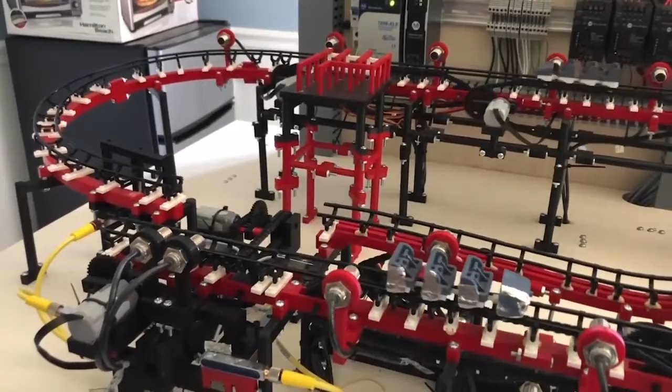All right, what's special about this project? So the coolest part about this model roller coaster is definitely the control system over here. It's a super interesting portion of this project because it's all PLC controlled, just like the real ride would be. We've got a safety PLC that is ensuring that the trains are in the right spot at all times.

We've got sensors that are detecting where the trains are on the track, and a bunch of motors on there that are all moving the trains to their proper location. It's basically set up to have a block system just like a real roller coaster, so it's keeping the trains separated, making sure that none of the trains are entering those block zones when they're not supposed to be. The system is also monitoring the whole operation of the ride, and will actually fault just like the real thing.

Those times when you see the roller coaster stuck up on the lift hill, and the maintenance guy comes out, this will emulate exactly how that works. The really cool thing about this is that because it's a model, we can actually trigger those faults and show people, hey, here's how a fault would occur on a real ride, and here's what is actually happening.

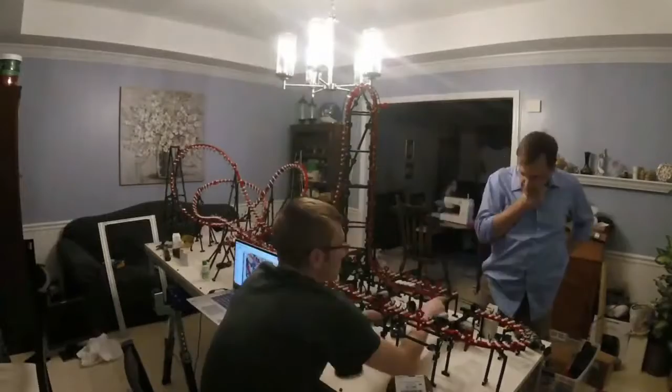Once I finished the design in No Limits, I brought it into Fusion 360 and designed all the track pieces and the whole tabletop, and designed the electrical system and all that stuff. Then we started printing - printed and printed and printed for like 3 months. It was crazy, we had like 3 printers running almost 24/7. It was insane.

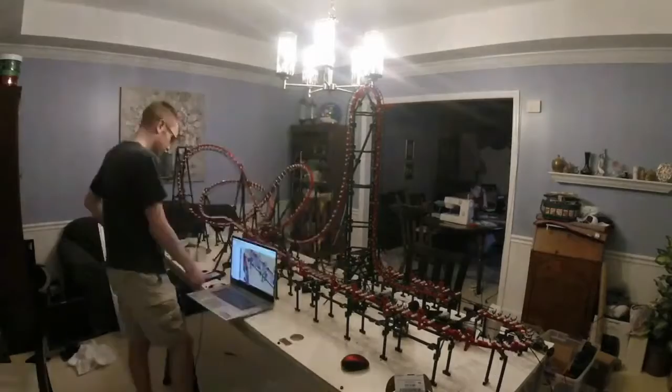And that was the time that COVID-19 hit. So now we're passing parts between each other because I was working with my advisor on printing everything. So we're printing, and then I'm getting to the point where I'm going to do the table.

One of the biggest challenges of the model was actually the tabletop. It was supposed to be CNC machined - I was supposed to take it into campus, lay it down on this 4x8 CNC machine, and cut all the holes, because I had designed the whole model so you could cut the holes in the table and then bolt down the supports. Well, that didn't happen because of COVID. I couldn't go down to campus because they weren't letting anyone down to campus. It was all closed.

So I came up with this idea. I don't have a plotter either, so I can't make a giant full-scale drawing to put on top of it, but that was the only way to do it and make sure it's dimensionally accurate. So I printed off like 100 sheets of paper, cut them all perfectly, and laid them down in a giant grid on top of this board. Then I went through and hand-drilled like 250 holes or something like that. It was a fun time, but it came out perfect - I was super happy with the end result.

Then, of course, I built it and put it all together over the summer, and that was about the point that Rockwell Automation had gotten all of the electrical stuff in, and I installed the electrical system. Over Christmas break this year, I spent an insane amount of hours programming this thing to make sure that it works perfectly.

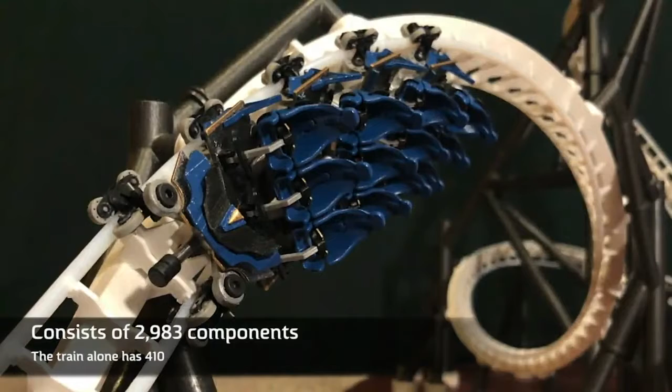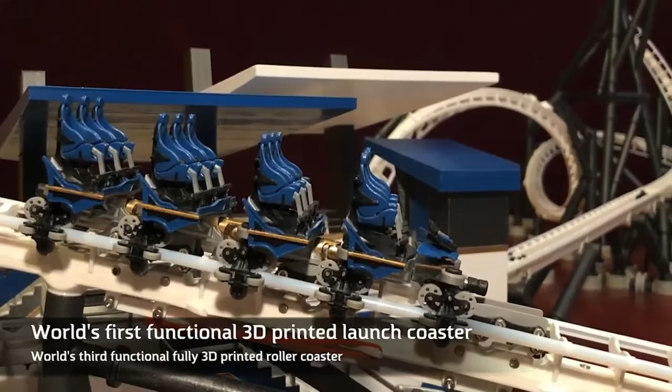Awesome. So tell me about your engineering journey through high school and college and getting to work in the industry. Yeah, so ever since I was super young, I knew that I was going to be an engineer. My dad was an engineer, so from a very young age I was instilled with the problem solving and general engineering curiosity for how things worked. Going to Iowa State after having an engineering class in high school really solidified my plan, and I went to Iowa State knowing that I wanted to pursue a career in the amusement industry.

I was given the opportunity to intern at Premier Rides in 2018, where that was just the time of my life - I got to see the ins and outs and the background of what actually went on behind the scenes of roller coaster design, which was the coolest thing to me. So then coming back and finishing up my time at Iowa State, you and I started the Iowa State TPEG group, which is an extremely rewarding experience. I think it's so important for kids to have that opportunity that we didn't have - to go to IAAPA and ASTM and have these experiences and opportunities from their freshman year.

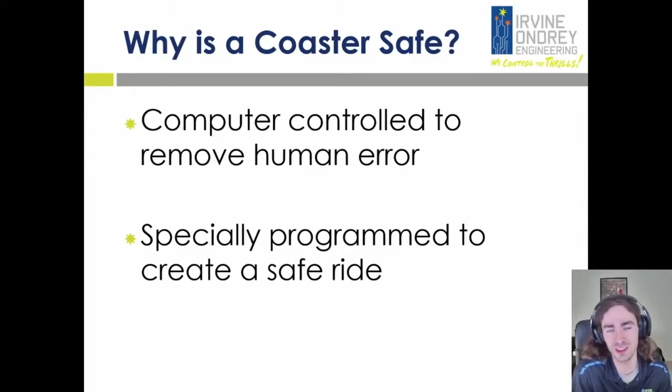So what makes a roller coaster safe? We have industry-wide safety standards that we have to follow, created by panels of the most experienced professionals. We design to very high safety levels. If you've heard of SIL and PL, we design to SIL 3 and PL e. These are the highest levels of safety and reliability.

We accomplish that through the use of things like safety processors. These are ControlLogix PLCs from Rockwell Automation, and as you can see, there's a pair of them. These work together and check each other during the ride's operation to make sure that everything is operating as it should. We also use Safety I/O, cards like this you'll see all around the ride. This is what reads proximity switches, causes brakes to open. All of the critical systems are controlled by these parts.

We also use a variety of other parts. These are safety relays. Rockwell Automation makes it real easy: if you see red, generally it's a safety rated part. We also use safe torque off with our drives. That's a way of making sure that a drive is not going to suddenly start moving without the proper authorization.

We specialize in simulated danger, and we try to make incidents as rare as possible because any event will become very high profile. If you've ever seen the news, it makes the news just for having to take people down off the lift, or even sometimes if it just stops on the lift. And we don't want to have any incidents worse than that.

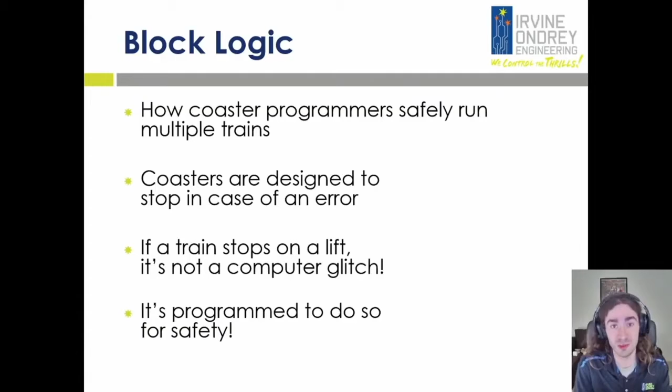The overall view of block logic will look something like this. You'll have the ride separated into a few blocks. Things like the station, the lift, the ride course, and the transfer track are generally all examples of blocks. The ride will have a way to stop the train at the end of each block, as well as a series of sensors, sometimes at the entrance and the exit, or just at the exit, so that the PLC is able to know where around the ride vehicles are located.

The way we program these, if you've ever heard of computer programming languages like C, we go something a little more basic than that. All the movement and computer-controlled safety comes from the PLC.

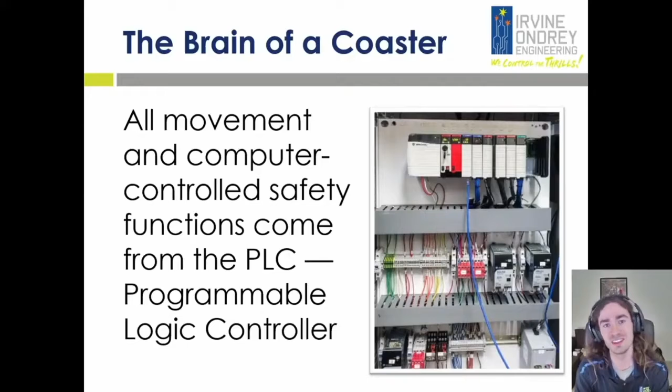One of these, as you can see, this is from another one of our attractions. It's called a programmable logic controller. Inside, it's running ladder logic, which is the descendant of old relay logic from the 1940s. We still have it, we've just computerized it so that we can run way more logic on these processors.

It's called ladder logic because the code looks like the rungs of a ladder. You'll have hundreds or thousands of these, and the PLC, as it's running, is constantly stepping down the line and checking each one. As you look at a rung, you check if all of these bits are turned on and it's able to get through the rung, then the circle there, that bit or that output will be turned on.

And these are able to run extremely fast, generally between 10 and 20 milliseconds a cycle. So we're constantly running this logic, constantly checking everything for proper operation.

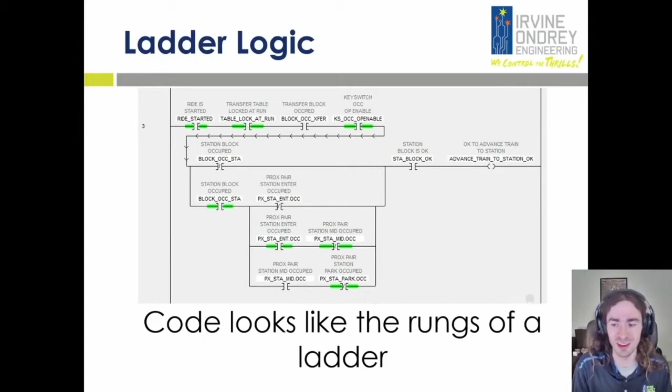So the inputs and outputs are sensors and our actuators. Here's a general overview of the way we do motion control and the way that the power flows to a motor. So you'll generally have some form of input protection, this could be a circuit breaker, it could be a fuse, just some way to make sure that you're not getting too much power through.

Then in some cases you'll have a contactor before your drive, or you'll just have a drive, and that drive will have safe torque off signals. These drives are designed so that if your safe torque off signal doesn't have power to it, the drive is not able to apply torque to the motor. That's an extra level of protection to make sure things don't start moving when we don't want them to.

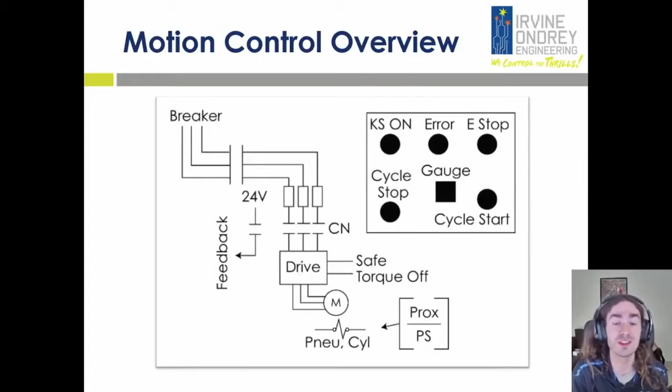And then the output of the drive will go to the motor. You'll also have monitoring on the motor to make sure that it's rotating at the rate that you're expecting it to, that nothing is going where you don't want it to. That's the main thing that we design for. You always want to have feedback, and you always want to have multiple ways to stop things from moving if you detect something that doesn't look quite right.

The most common input sensors that, if you've ever been to a theme park, you've seen these, are proximity switches. These use inductive sensors to look for metal. It can be a brake fin, it can be a wheel assembly, and that's what the PLC uses to detect where on the track the train is.

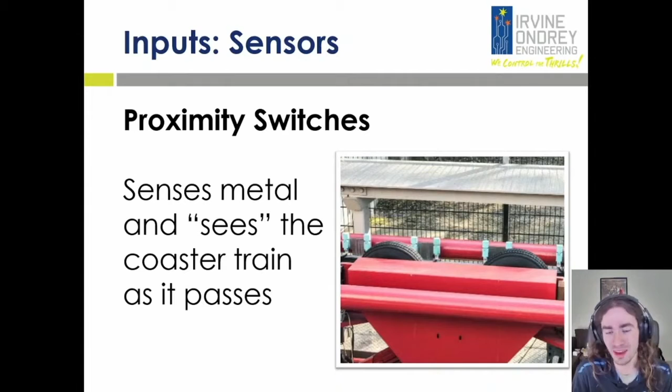These are from Pepperl and Fuchs. There are many brands of proximity switches. Turck makes some, Allen Bradley makes some, SICK makes some. They're very common through the industry, although I think most people are familiar with the green Pepperl and Fuchs ones.

We also have the ride operator panel, and that's how ride operators give commands to the PLC. You'll generally have all sorts of input buttons there, as well as indicator lights in some of the buttons that tell the ride operators what's going on.

And of course, in the center, you'll also have an HMI, or human machine interface, and this is an input and output screen, so you can display all sorts of data for the ride operators, for maintenance staff, and for debugging during commissioning.

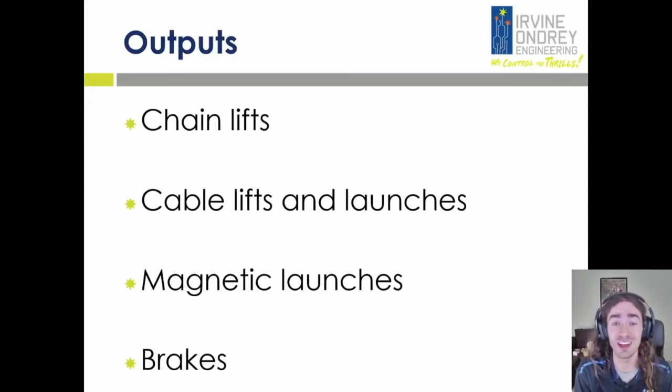The outputs of the ride, these will be things like chain lifts, magnetic launches, and your pinch brakes. So the most popular output that we seem to get a lot is linear synchronous motors, or LSMs. These are ways to get really a lot of power into a train, get it moving very quickly.

You also have linear inductive motors. Those are slightly older, but you do see them a lot. And cable launches - those can be powered by motors, by hydraulics, or just by a big block of concrete dropping really fast.

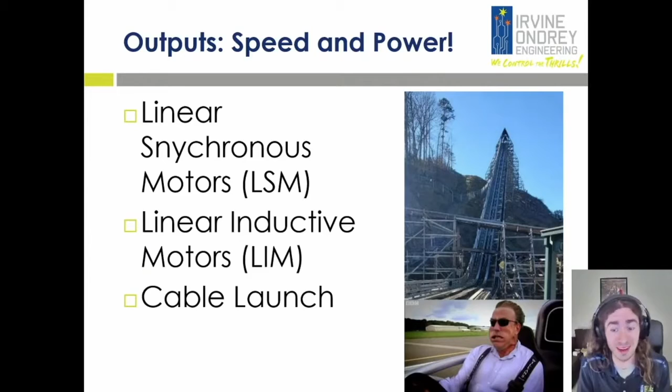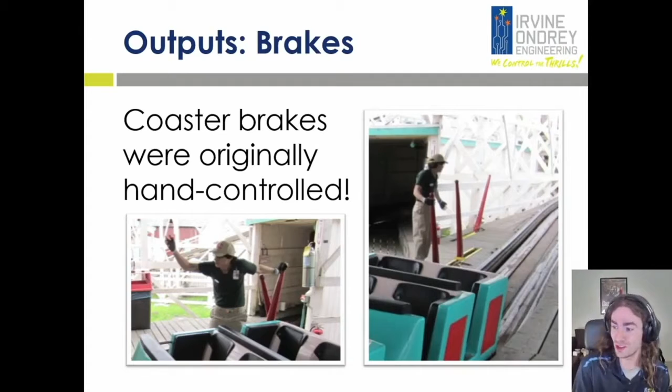Coaster brakes originally were hand controlled. You'd have a ride operator with a big lever, they'd pull it, and you'd stop the train. It's not exactly safe because now you're relying on a person to control your motion. So now we're getting into computer control of them.

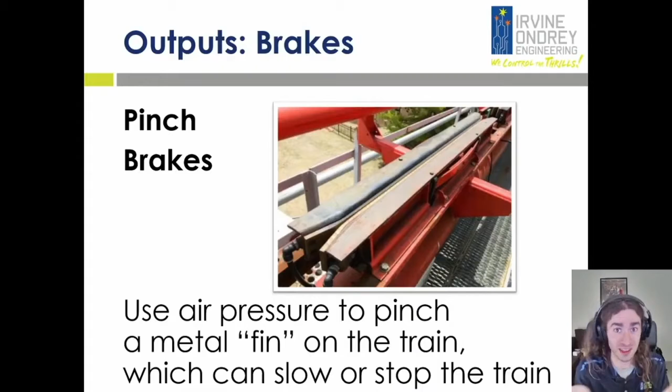Pinch brakes are the most common. These use air pressure to pinch on a fin on the bottom of the train, and that can slow the train by pulsing it, or by holding it shut, you can stop a train. These are always designed fail-safe so that if you lose air pressure, you'll always be able to bring a train to a stop.

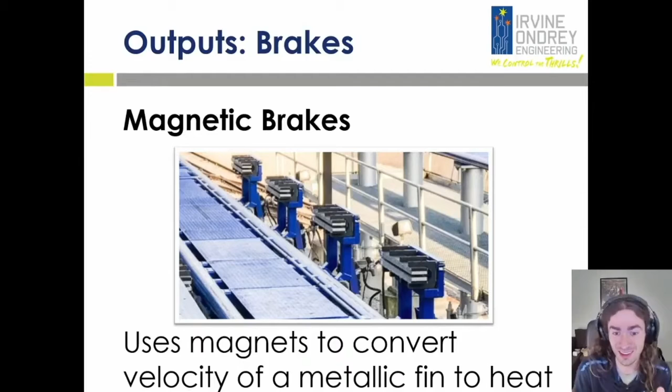Magnetic brakes are a slightly more recent addition to roller coaster parts. These use magnets to convert the velocity of a piece of metal into heat. So by having a metallic fin move through these magnets, you actually generate heat inside of the fin. It's a very fascinating bit of technology there.

So some coaster safety information. We start the creation of these control systems sometimes years in advance, and that is creating drawings, writing the code, getting everything ready for when we first go to site. We have panel shops that build these cabinets for us, and then we ship everything as a unit. The park installs it, and then we come out for our commissioning.

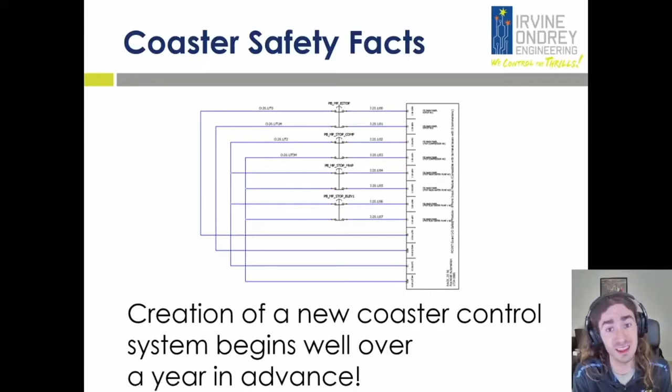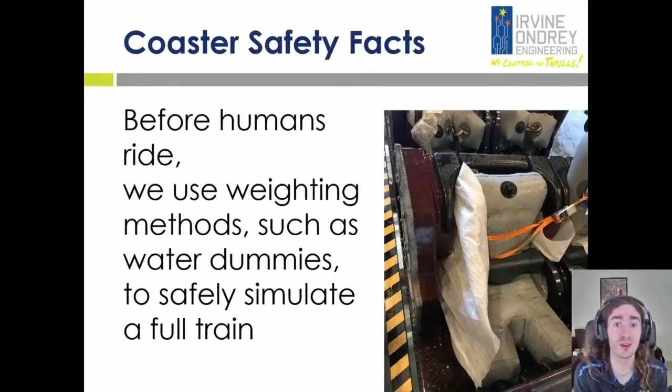So how did we get here? We generally try and say avoid being completely focused on 'I want to design roller coasters,' because there are very few, unfortunately, positions like this in the world, but there are a lot of other very awesome and interesting jobs too. Before I started working with Irvine Ondrey Engineering, I used to work at Rockwell Automation and American Electric Power, back when my hair was a little bit shorter.

An engineering degree is very versatile. You can take your skills to many locations. However, if you're coming to a thing like this, you're probably not going to be dissuaded that easily. So here are our general tips. We say always keep your goal in view. You never know where your path is going to take you. When I started working with those other companies, I wasn't sure if I was going to come back to the industry, but I saw it as a good path. AEP is a great company, Rockwell is a great company. We wound up coming back in.

Meet as many people as you can in the industry. All of us do love meeting new people. We like talking with people. Our job is to have fun, so we try and have fun with others. Friend us on LinkedIn, shoot us messages, we all appreciate it. Live your passion. We love to see passionate people join this industry. We don't want, you know, if you're in this job, we want you to really, really love it.

Look for opportunities and don't be afraid to take risks. You're always going to be learning. You never are going to be done, and we love seeing people who will take those chances, because that's where you learn the most.

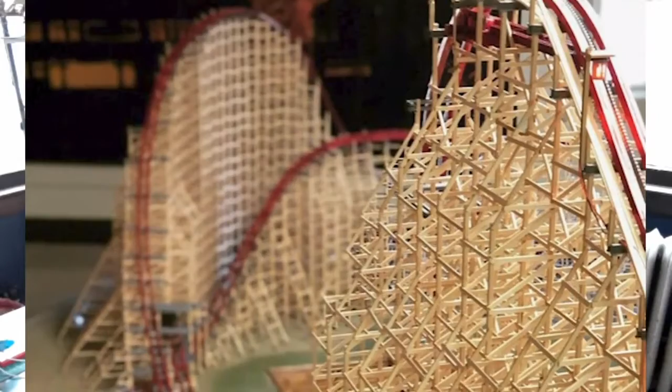And I said yes, without even thinking about what it would take to do that, because from my perspective I was thinking, wow, I get to work with Cedar Point on a model of their new awesome ride, because every time they come out with a ride, it's bigger, better, faster, awesomer. So I would just regret it if I didn't. That's how that transpired.

And next thing you know, they were asking me to put a proposal together. And the one funny thing is I wanted the model to be huge, and they said, Matt, you need to scale down, let's make it small. So we basically agreed on the size based off what needed to fit in their museum. And that is the tale of how that happened.

So it's pretty cool. If you prove and can show and document that you can make these working models, people will get interested, and you can get cool opportunities. So a model that takes up half a room is considered small.

As you work on these models, you quickly find out the scale is tough to work in when you go down to smaller sizes. For something like Vertigo, the scale I was working with worked because, let's say at 1/12 scale, that just means 12 tables then gives me the full length of the actual ride. But when you're working with Steel Vengeance, it's terrifying because this ride is already massive. It's its own hyper hybrid.

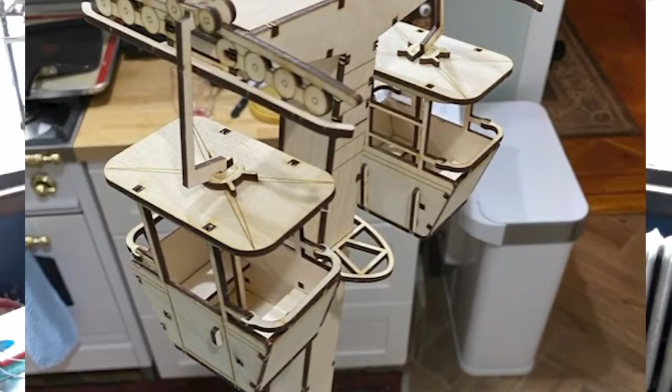What I do now, I design these coaster cutouts, which are laser cut wooden models of actual roller coaster trains. What I love about it is they're popular enough now that we can design actual trains off rides that exist now, go to a park and say, would you like to sell these at your park? And they love it. The one thing I love is they really like the details we're able to capture in these models, which I find so fun as an enthusiast.

That's what I have fun with, finding ways to integrate these cool little tidbits, these nuggets of detail of a ride, into the models. I love that we can get that detail, and I love that I can go through Google Images of these trains and design a proposal, then go to a park and say, we have this cool concept, what do you think? And they're like, wow, we didn't even ask you to do this, this is amazing, where do I sign? So I love doing that, finding my own way to celebrate the roller coaster aura.

Where can people find more information about you and videos and all that?

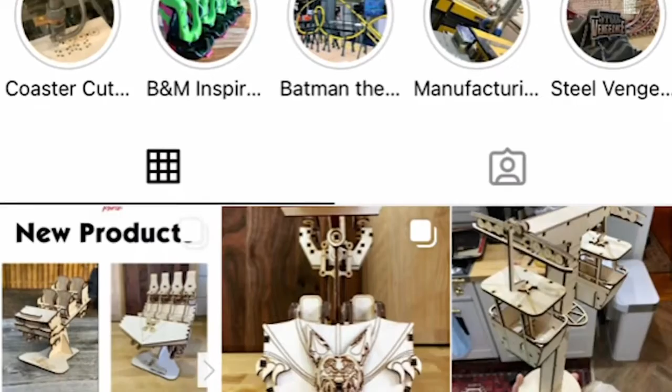If you want to follow my work, the best place is Instagram right now, Print My Ride, all with underscores. I also have a YouTube channel I've been trying to build up, also Print My Ride, so you can search that and find me there. And if you want to see my physical work, at Cedar Point we have the Steel Vengeance model, now in the arcade. Also at most Cedar Fair parks, soon to be Six Flags and Busch and SeaWorld, are the coaster cutouts, and you can purchase those and build wooden models of your favorite rides.

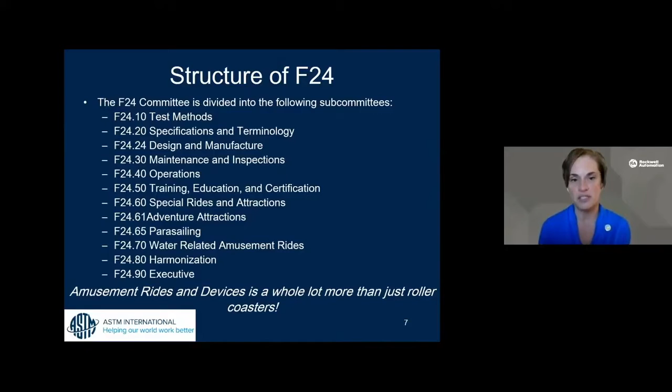So we break up the standards usually by design, maintenance, and operations, and then we have some special attractions as well. So if we look at the list here, you'll see F2424, that's the design and manufacture standards. F2440 is the operations. But then when we want to talk about parasailing, well that's the F24.65 committee. So when you come to a meeting, you want to look for which subcommittee you want to participate in, and then you go to those meetings, and in those subcommittees they might own an entire standard or they might own a part of a certain standard. So the standards do not directly correlate to each one of these committee numbers, but they're pretty close.

And then there's one committee, F2490, that's the one I participate on, that's the executive committee. So we have our chairman, our vice chairman, our secretary, our membership secretary, and all of the subcommittee leads, they sit on the executive committee. And then there's a couple of what's called interested parties or representing parties. We have some manufacturers and we have some owners. So I represent a manufacturer because we're a technology company that provides technology. So we're a supplier manufacturer.

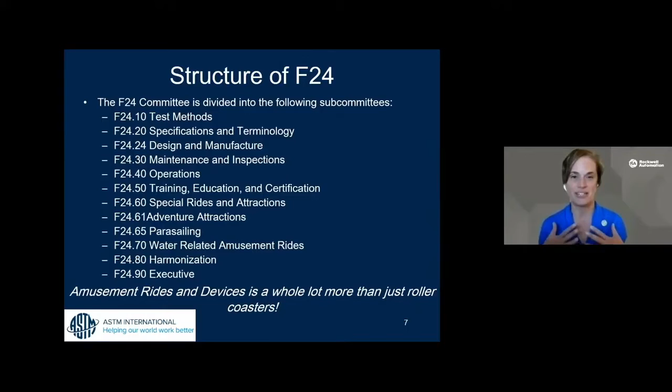So the executive committee is the leadership that looks at all that we do in F24 and makes sure we're heading down the right path of what the committee needs and what the industry needs. So all subcommittee meetings are open for you to attend, any of them, except the executive committee.

Now, when you get into that subcommittee, how are things further broken down? So they break them down into what's called task groups. So we might be working on just a couple paragraphs in a standard. And when you work on just that, we like to break it up into smaller sections because then it makes it easier for balloting. So those small sections are called task groups.

So here's some examples over the last few years. They were working on loads and strengths. I lead the committee that's working on cybersecurity for safety rated control systems. So we're going to work on some language that's in the standard about design, but then we're also going to go work on some language about maintenance and about operations, but we're starting with design. We've had major modification, large rider phenomenon, the trains, and they've been doing some updated stuff with trains. So each one of these little task groups, they have different things that they work on.

Then each task group is broken down into what's called a work item. And that work item is the actual little bit of language that you're changing. So a task group might be working on a section of a standard, and then they'll break that section up into smaller work groups. And then those work groups eventually turn into ballots. And if you're a voting member, that's what you would see come through as a ballot. And when we vote on the ballot, that's what becomes new language.